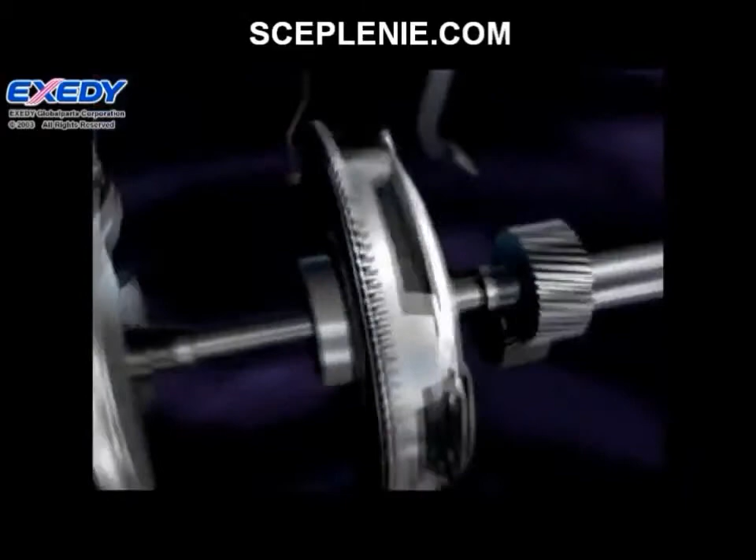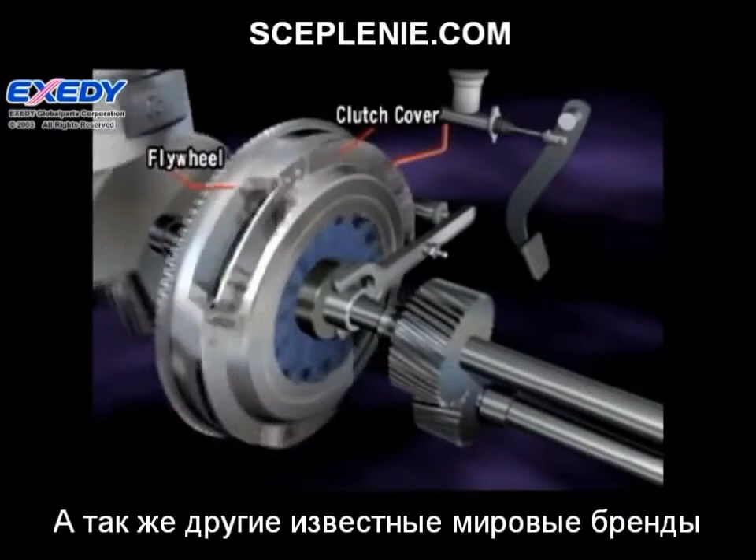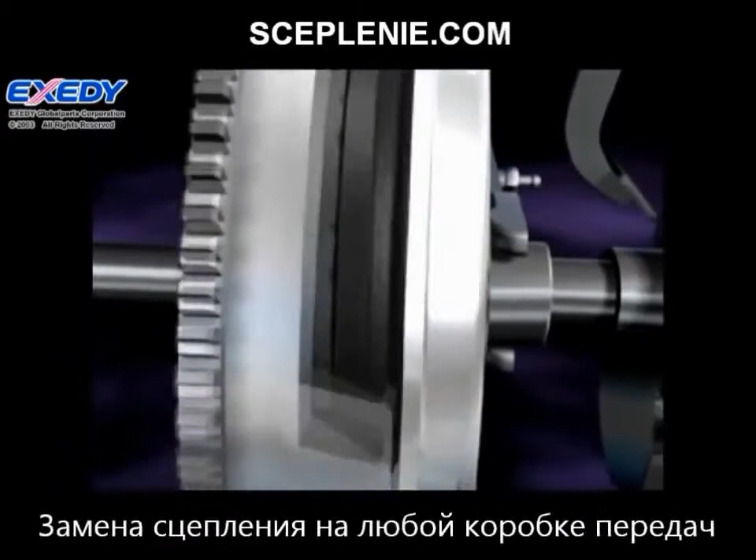The clutch is a mechanism that smoothly transmits and cuts off engine power to the transmission by engaging and disengaging. The clutch cover and flywheel always revolve together with the engine. When the clutch cover pushes the clutch disc against the flywheel, engine torque is transmitted to the transmission.

When the driver steps on the clutch pedal, it releases the pressure plate that was pressing the clutch disc against the flywheel, disengaging the clutch disc. In this state, engine torque is not transmitted to the transmission.

The clearance between the clutch disc and pressure plate when disengaged is approximately 1 mm for passenger cars and light commercial vehicles, and 1.5 mm for medium and heavy commercial vehicles. This engagement and disengagement is the basic principle of a manual clutch.

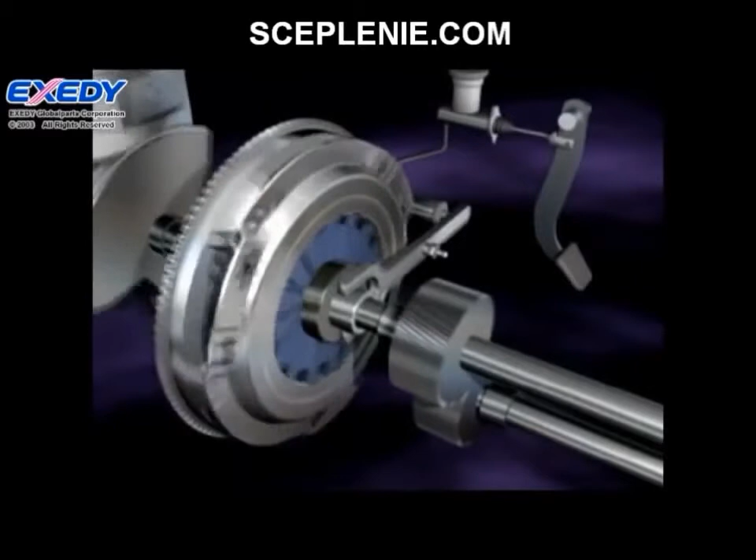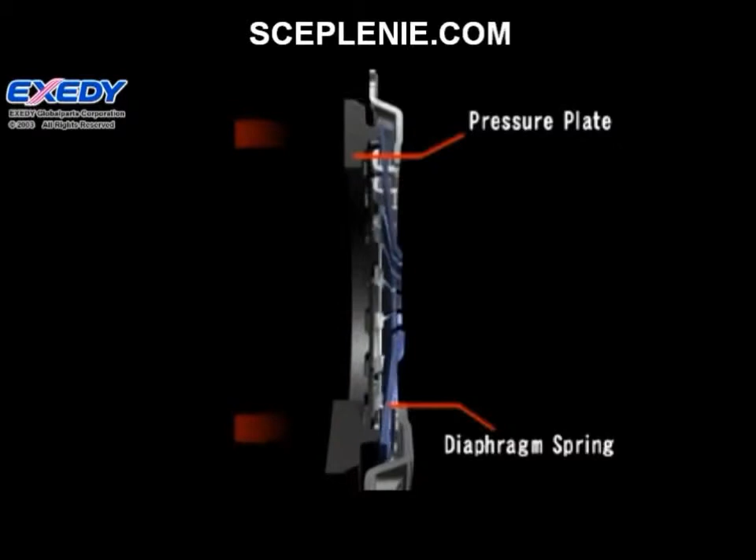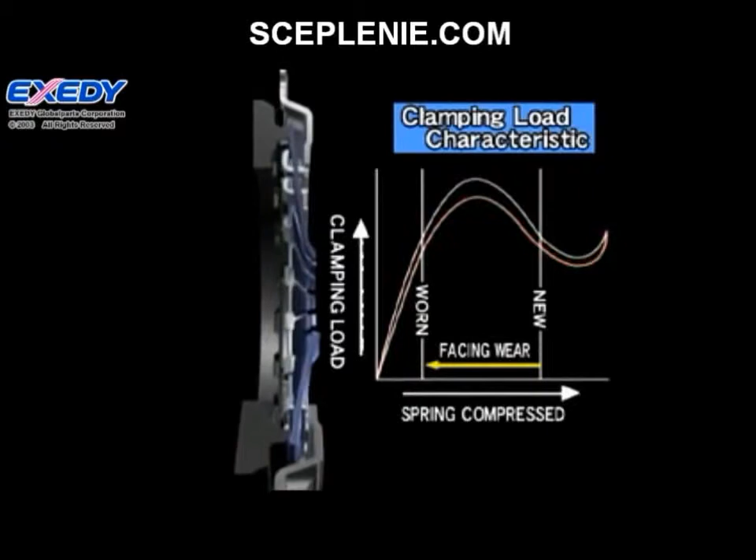The clutch cover's diaphragm spring is a disc-shaped spring that presses against the pressure plate and controls the amount of pressure applied. The amount of force that presses on the diaphragm spring is called the clamping load. The graph that shows this change in clamping load is known as the clamping load characteristic.

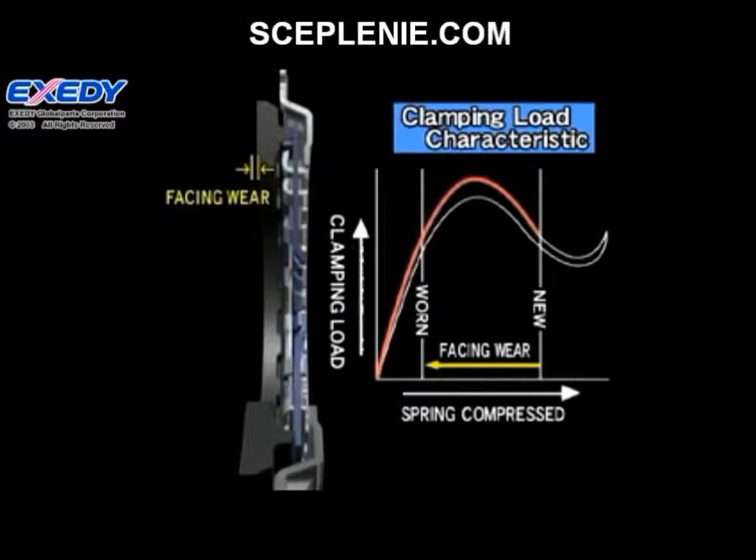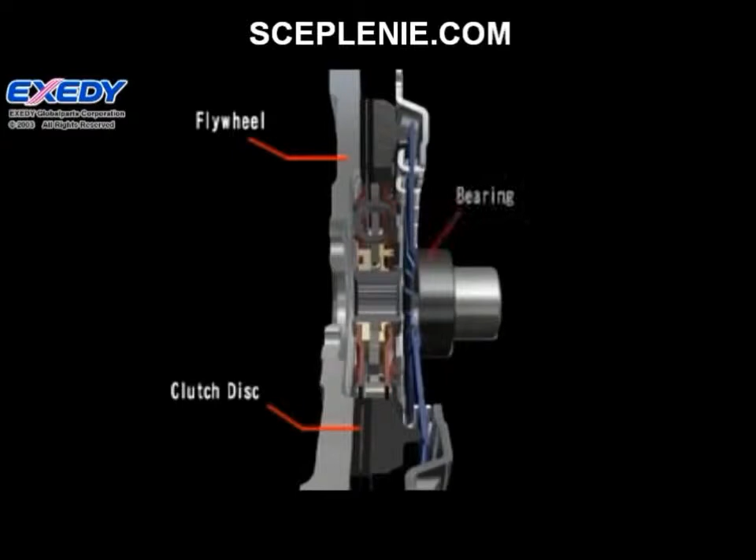This indicates the clutch disc's usable range. If wear exceeds this range, it will be impossible to obtain the necessary compression force and the clutch will slip. The release load of the diaphragm spring and pressure plate travel when the clutch disc is disengaged is shown by this graph, which is called the release characteristic.

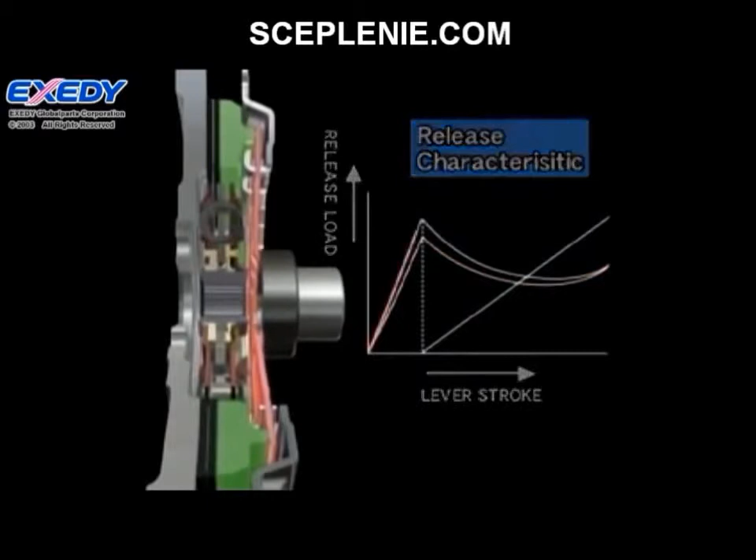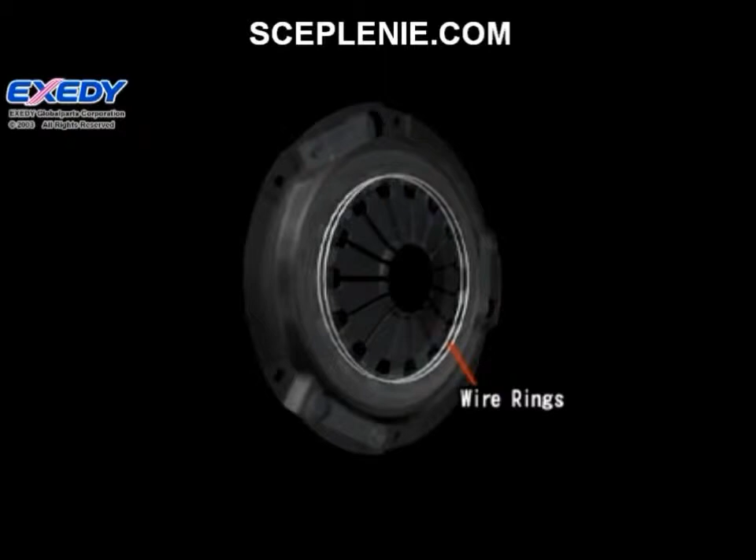The other parts that comprise the clutch cover assembly are wire rings that serve as the fulcrums for operation of the diaphragm spring, strap plates that secure the pressure plate, and the clutch cover itself, which contains all of these parts.

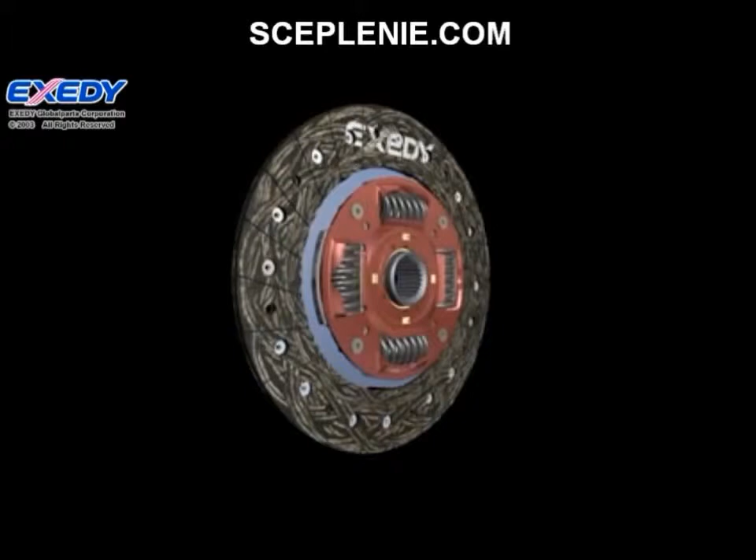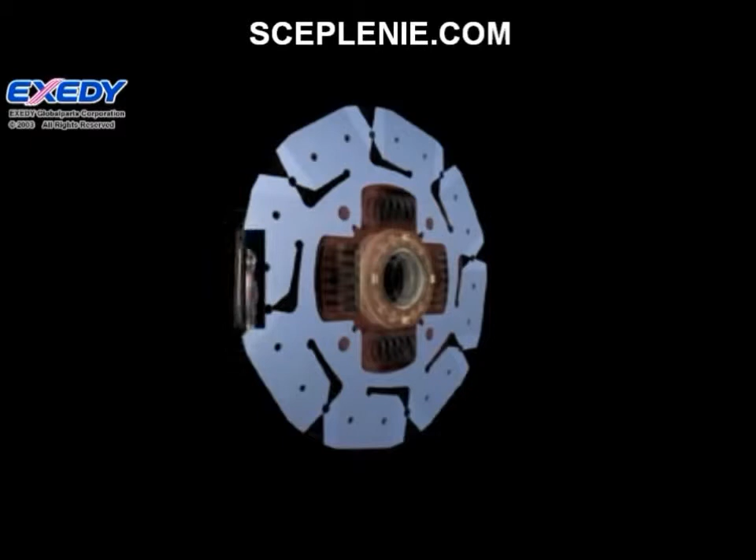Next, looking at the clutch disc assembly, engine torque is first transmitted from the pressure plate to the facing material. This facing material is supported by the cushioning plate, which makes half-engaged clutch control possible.

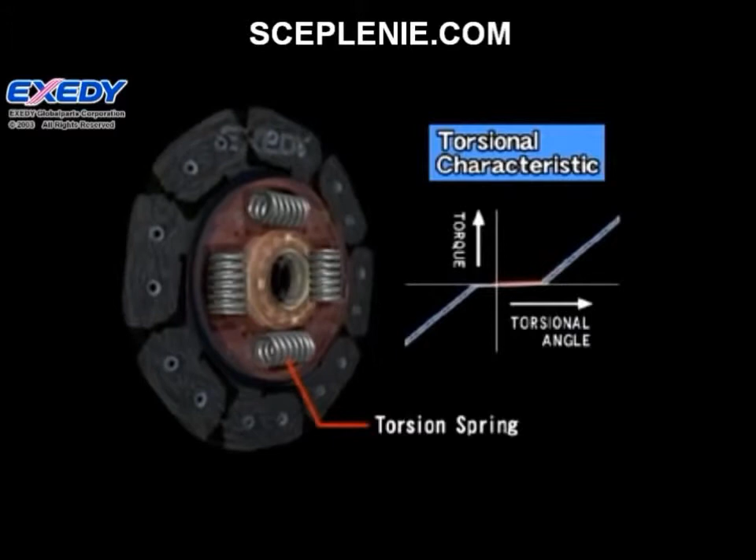Engine torque is transmitted to the retaining plate and clutch plate, which hold the entire assembly together while actuating the torsion springs. The primary function of the torsion springs is to absorb fluctuations in engine revolution. Finally, engine torque is transmitted to the transmission via the splined hub.

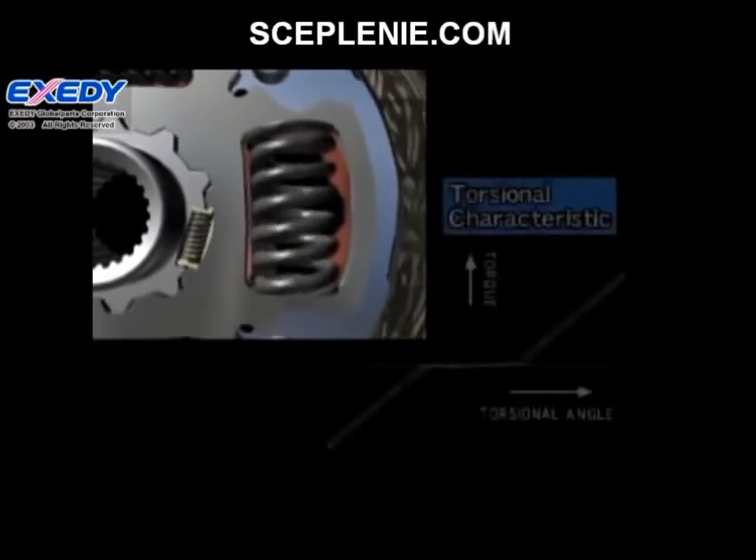Fluctuations in engine revolution while idling are absorbed by this two-piece splined hub, which is coupled with several small dampening springs. It functions to prevent a chattering noise when fluctuations are transmitted to the transmission.

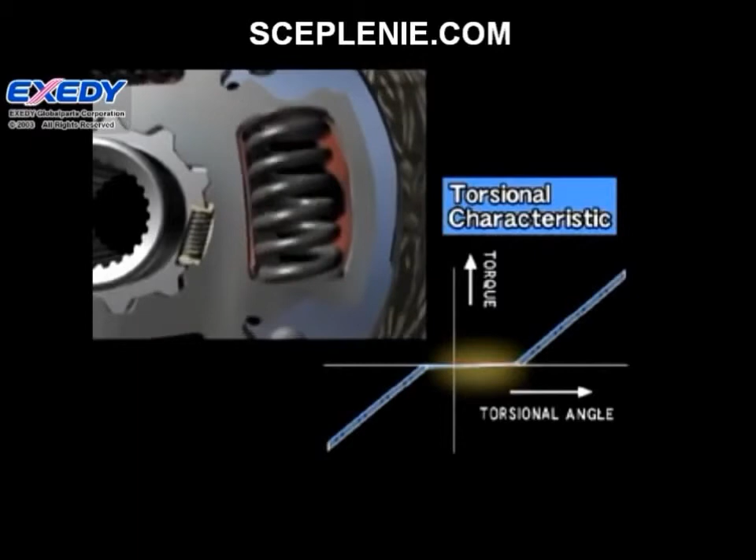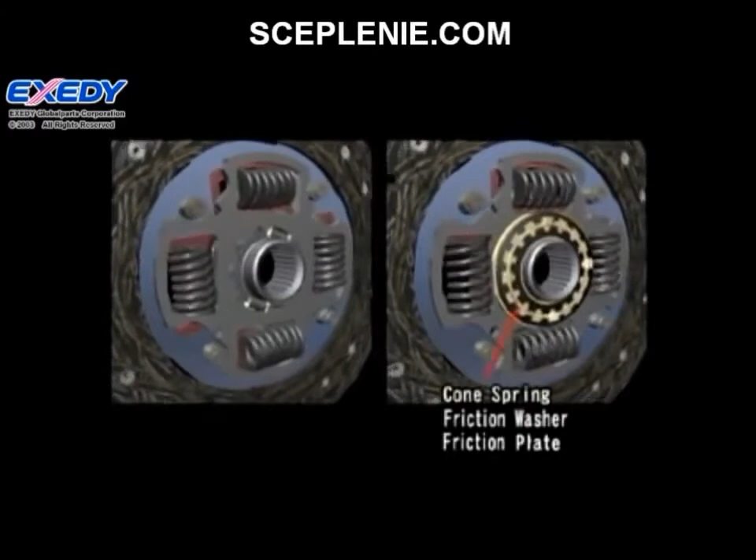The shock from engaging the clutch while accelerating is absorbed by torsion springs like this one. The cone springs, friction washers, and friction plate function to quickly stop the torsion springs from vibrating, reducing both noise and vibration.

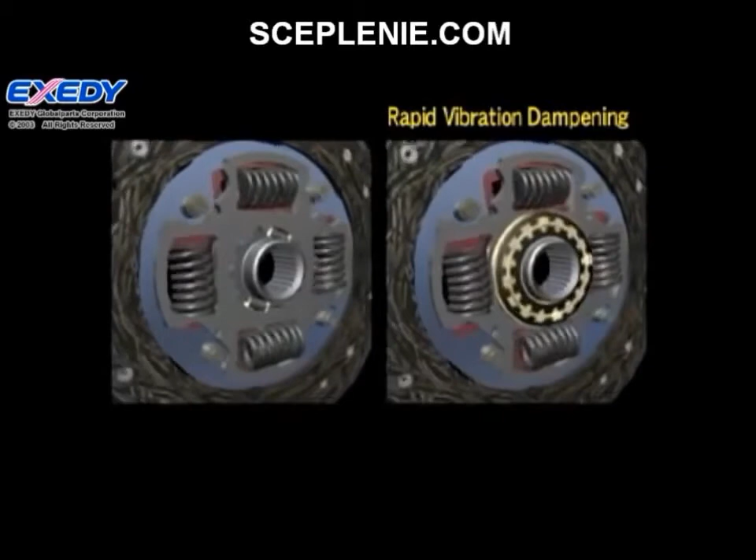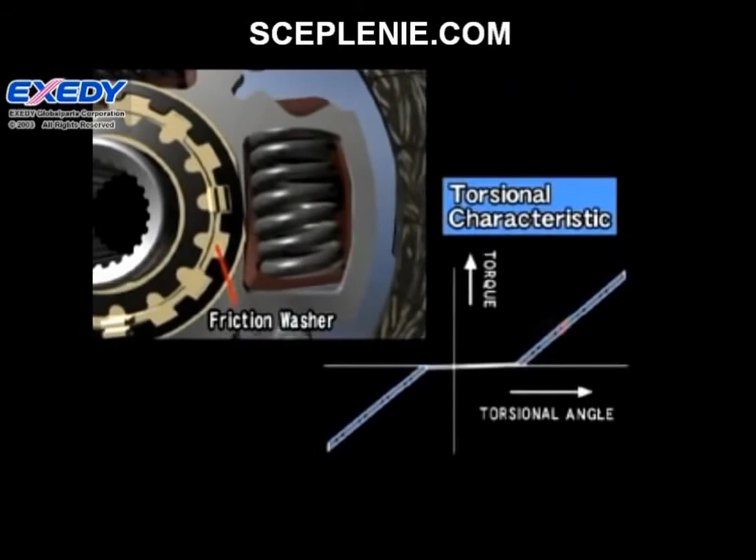During engine braking, the torsion springs are compressed in the opposite direction compared to when accelerating to absorb the shock of deceleration. When driving at a constant speed, fluctuations in engine revolution are absorbed by the torsion springs and friction washers. This reduces the amount of chattering noise transmitted to the transmission and the differential gear.